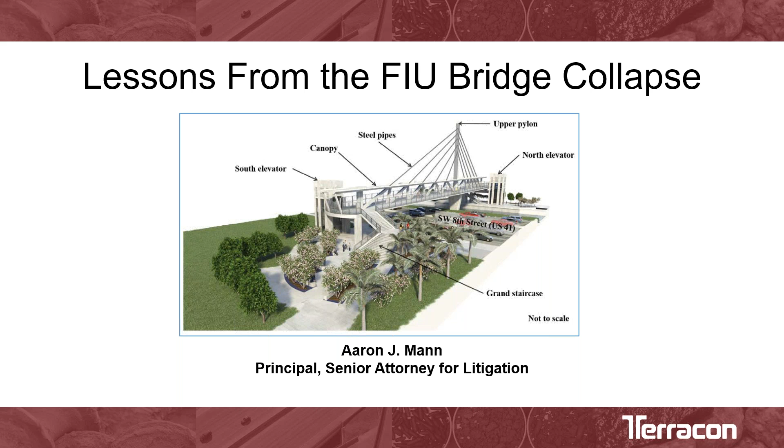I feel like I need to give a disclaimer up front, which is, obviously you heard my bio, and what you did not hear was that I have any background in engineering whatsoever. I spend my time arguing about whether or not engineers did a good job, but I struggle to put together IKEA furniture. So I would ask that as we go through some of these things today, that you understand I'm coming about this from a kind of a legal risk management perspective, and not from the perspective of truly engineering.

So let's talk about the project. This was a $12 million pedestrian bridge that the Florida International University had commissioned, and the idea was they wanted to link up their campus on one side and cross over this busy road and a canal to a residential neighborhood that was on the other side, a neighborhood where a lot of their students lived, and they wanted to provide a manner for their students to get to and from the campus safely.

Oddly enough, the impetus for this project was that one of their students, a couple years before this project had come into fruition, was crossing a busy road trying to get to campus and was struck and killed by a car. So from the very beginning, the idea behind this was to provide safe transit for their students.

But it was also supposed to be, I think, kind of a signature piece for the university. And if you look at this design, this is an impressive looking design for a pedestrian bridge. To have the very tall pylon, to have these cables stretching down, this was to be a focal point as well that I think the university was really proud of.

The project itself was funded with FDOT money, but FIU was the contract administrator for the project. FIU and FDOT worked in close conjunction with one another on this, and so they put this out to be a design build project.

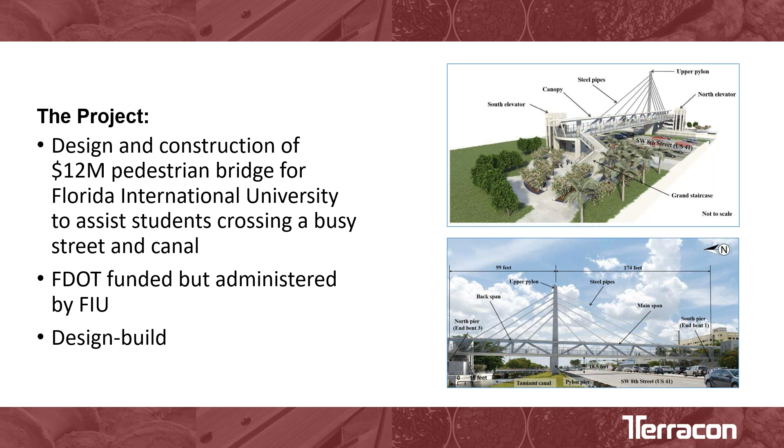In terms of the project team, you have FIU and FDOT acting as co-owners. You have Munilla Construction Management, or MCM. They were the design builder, and they were also the general contractor for the project.

You have FIGG. FIGG was the prime engineer, the prime designer, and the structural engineer of record for the bridge. You have Louis Berger, who was hired to do the peer review on the design. And then you have Bolton Perez and Associates.

They were the CEI firm, and they were hired directly by FIU and FDOT. I'll explain a little bit why I point that out, why that's important. But keep in mind that the CEI firm in this case is working on behalf of the owner.

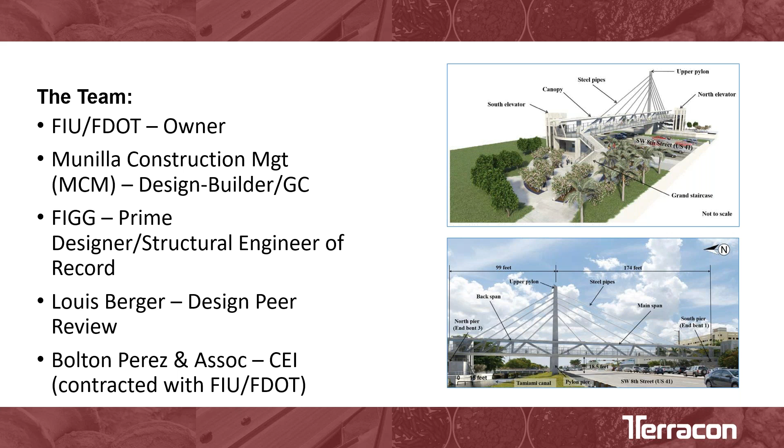As far as the design itself goes, very imposing, impressive structure. But really what it comes down to is you have two spans: the main span that goes over 8th Street, and the back span that goes over the canal. All of the steel pipes up above, everything that ties into the pylon, those are not structural components, just for aesthetic purposes. So this is not a suspension bridge, this is a truss bridge. There is a single truss running down through the middle of the main span and the back span, and it's a single concrete truss that's reinforced with post-tension cables.

As we go into this, eventually there's a report issued by the National Transportation Safety Board, and they go to great lengths to describe the unique nature of this design with a single concrete truss running down the middle. They refer to it as unique, I think unusual. They say they've never seen a bridge designed like this anywhere in the world, which is interesting to hear, and you'll see why, as they were also very critical of that design. But as you can see here, we're talking about two spans that rest on the piers on the ends and the pylon in the center.

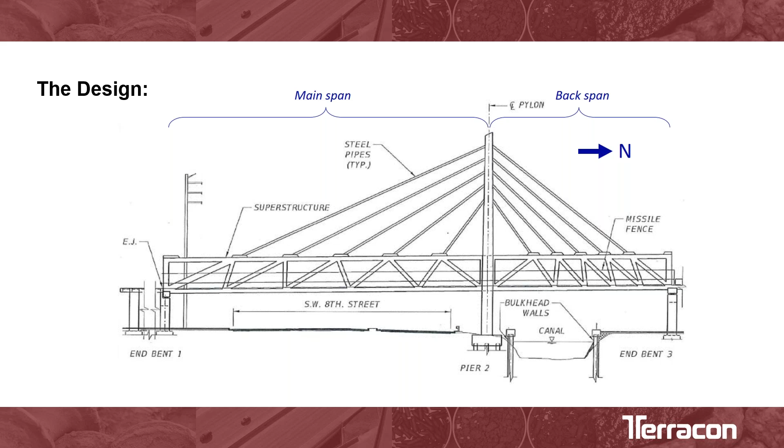As far as construction goes, it was to take part in 8 stages. Today we're going to talk about stage 3, which is the erection of the main span. Unfortunately, that is only as far as the construction progressed. But stage 3 meant that the main span would rest atop the south pier and the pylon.

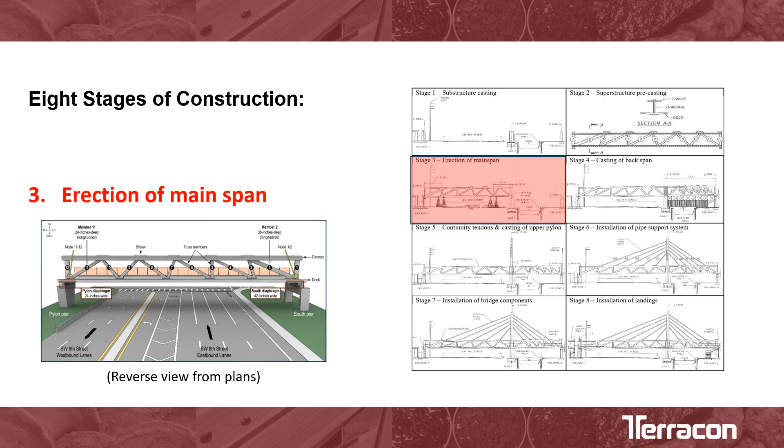The way this bridge was constructed, they used a technique called accelerated bridge construction, or the ABC method. This was a technique devised by FIU, so not only was this bridge itself a point of pride for the university, but even the manner in which it was being constructed was kind of their technology at work. The theory behind ABC is you have these components to the bridge that are all cast off-site and then brought into place. You essentially hook up these large pieces into the final design. One key advantage is that you don't have to shut down traffic for as long.

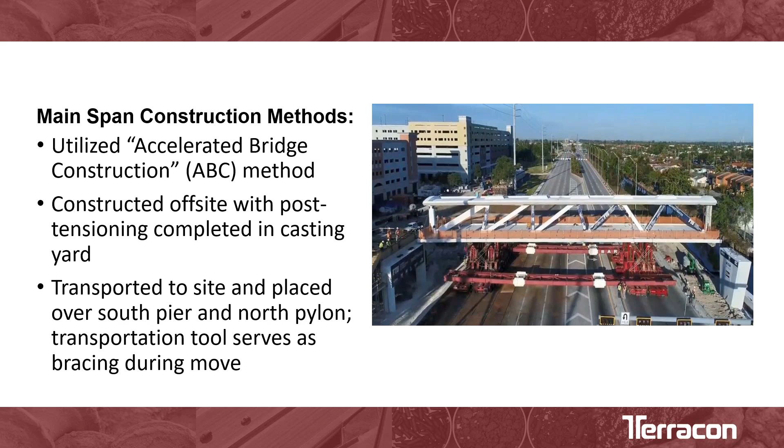In this picture, on the day it was taken, you can see they've shut down traffic for the day as they're bringing the main span into place. They did this on March 10th, 2018, moving the main span into place. This was a big day for the project, a day of pride. You had 6 PEs from FIGG there, including the president of the company, to watch this main span get put in place — the first real tangible piece of this bridge really coming into focus.

So they brought it into place, set it down on the pier and the pylon as designed. Then after checking it, they removed the bracing from underneath, removed the machinery, and it spanned the road, Southwest 8th Street — again, what it was designed to do. MCM, BPA, FIGG all examined it. They saw no issues at that point in time.

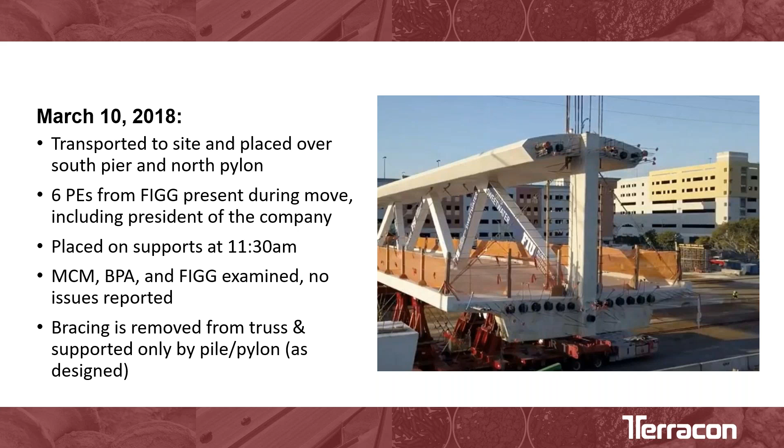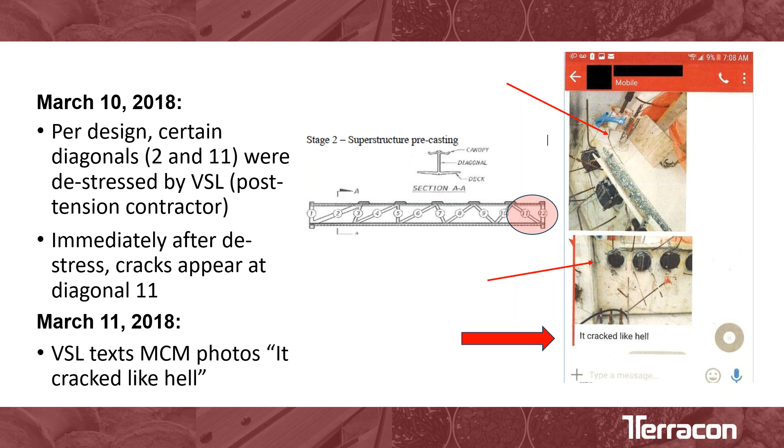On March 12th, MCM starts taking more pictures. Bolton Perez is out there as well, photographing these cracks. They notice cracking here, and pretty significant cracking here, all the way down through here. All this is in the same area—where number 11, which comes down diagonally, meets number 12 and the deck. So they take these pictures and send them to FIGG, asking for their input and for them to review it as quickly as possible.

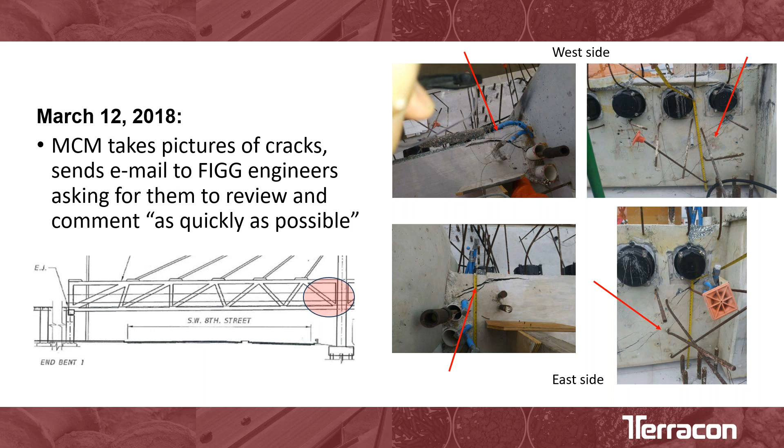Unfortunately, that email sat unopened until the next morning. The engineer at FIGG opens the email at 8:30, looks over the pictures, and an hour and 15 minutes later responds. They tell MCM to put in some plastic shims, but say no jacking is required, and that they do not see this as a safety issue. So you have the structural engineer of record saying they do not see this as a safety issue—they've looked over the pictures and they're not concerned.

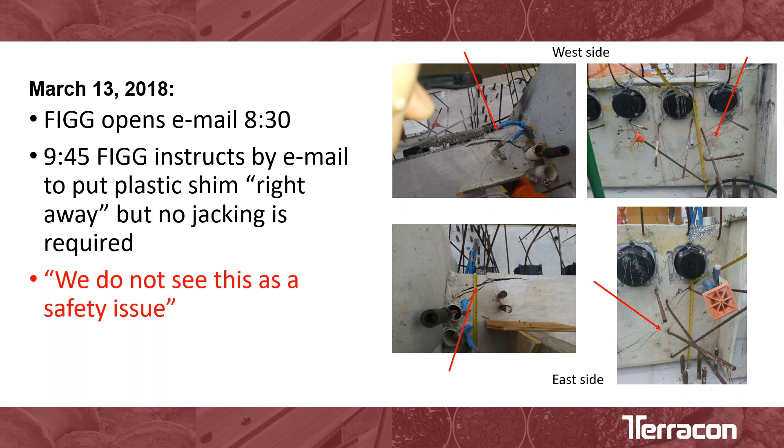Later that same day, the engineer from FIGG leaves a message for FDOT to inform them about the cracking, but says they do not see this as a safety issue and are not concerned about it from that perspective. Unfortunately, that voicemail was not opened until after the bridge had already collapsed. So FDOT would say they were never properly aware of the situation—at least that individual was not, though FDOT as an organization was.

Later on that day, 5:18, FIGG emails MCM saying they've evaluated this further and confirmed this is not a safety issue. So again, the structural engineer says, three times now, not a safety issue. At the same time, FIGG recommends they re-stress the post-tension rods in member 11. This is something that will be examined closely later, because it's not part of the original design. FIGG would say they're basically taking a step back—the original design had those tendons stressed, then they were de-stressed, and now they're re-stressing them to put it back in the condition it was before. NTSB and OSHA both say that was a design change that was not properly vetted. Nevertheless, that's the decision that was made, and it was communicated to the team.

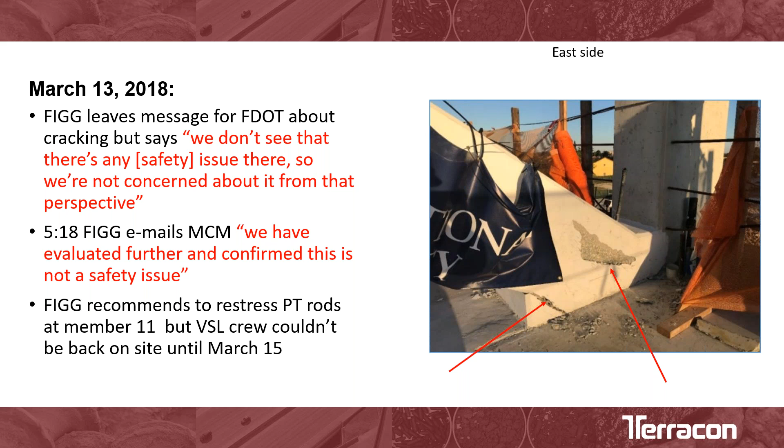As it turns out, VSL, the post-tensioning contractor, couldn't get out there for another two days, so they're scheduled to come on the 15th to do this work. Meanwhile, the cracks continue to grow. This is March 14th—you can see this crack is 4 inches deep, with a pretty significant length.

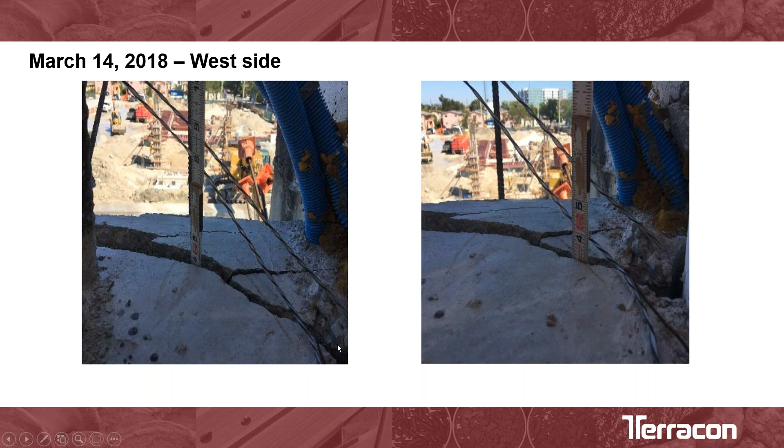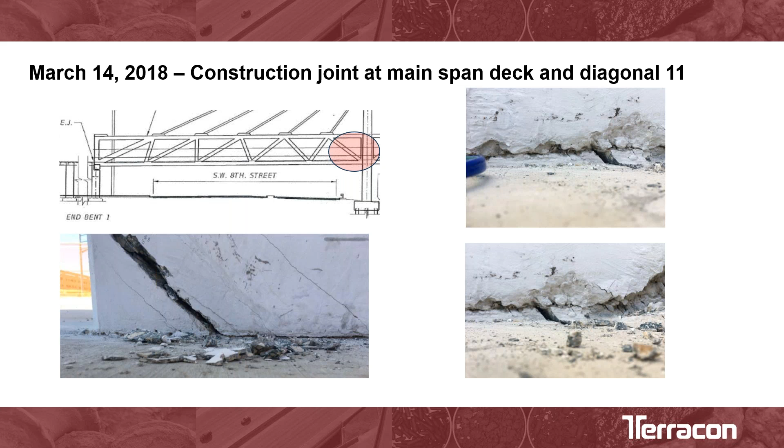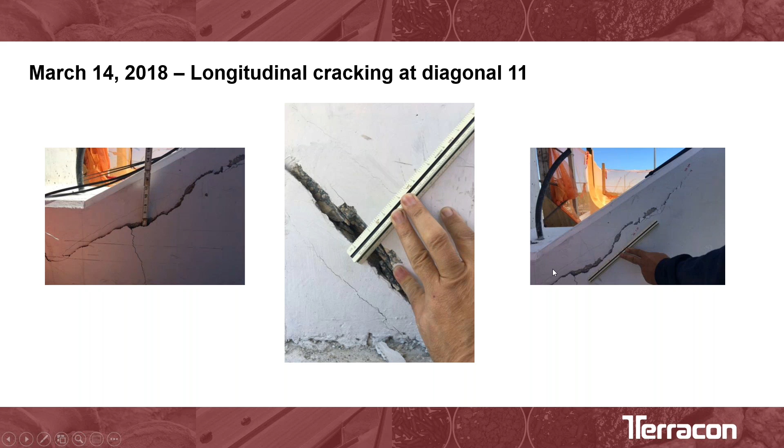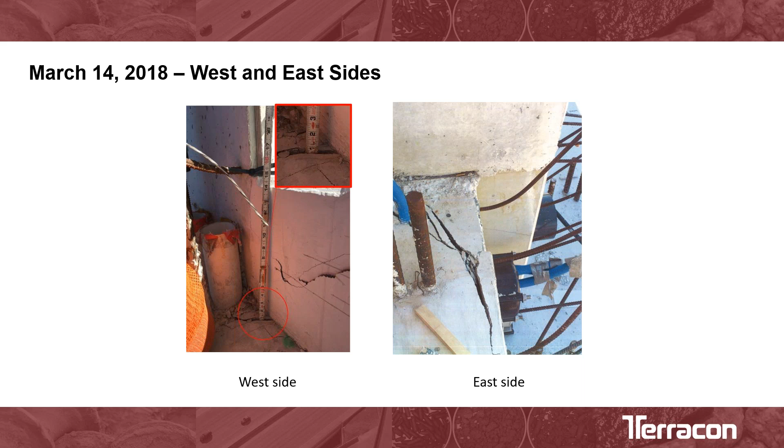We've got more pictures here from the connection between the deck and diagonal number 11. This has been in place for basically three days at this point, and we're seeing cracking like this—longitudinal cracking at diagonal 11, in this case well over a foot long, and even more on either side. All this is on March 14th.

MCM sees these cracks are growing, but they don't specifically tell FIGG that on the 14th. Instead, they call FIGG and set up a meeting for the next day, the 15th, asking FIGG, as the structural engineer, to tell them what's going on and give their findings on these cracks. So FIGG spends that day analyzing and preparing their presentation for the meeting. Meanwhile, VSL is told they need to mobilize for retensioning also on the 15th. I'll point out that while all these discussions are going on, while everyone is taking pictures of these cracks and discussing what they think may be the issue, traffic continues to flow on Southwest 8th Street underneath the bridge.

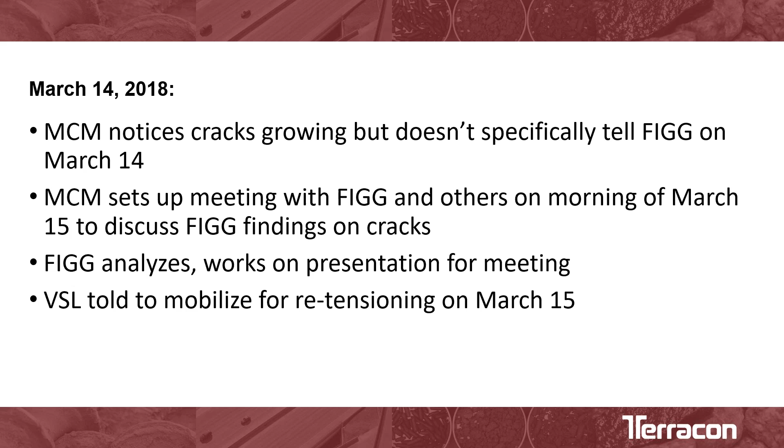So on March 15th, 7:45 a.m., people start arriving to the site for this meeting. You've got two structural engineers from FIGG, including the engineer of record. You've got MCM, you've got Bolton Perez. They all go out and examine these cracks.

And at 9 o'clock, there's an all hands meeting in the trailer. So you have MCM, you've got FIGG, you've got the university, you've got FDOT, and Bolton Perez. At that point in time, FIGG gave a presentation to everyone. They said that they have no safety concerns. They said that this was only a temporary loading condition.

At the same time, FIGG could not explain why the cracks were as extensive and what it was they were seeing. They said it was not replicated by the engineering analysis. And so while this is going on, two things are happening. Number one, VSL goes out to begin their post-tensioning work with 3 employees on the bridge. And again, traffic continues to flow under Southwest 8th Street.

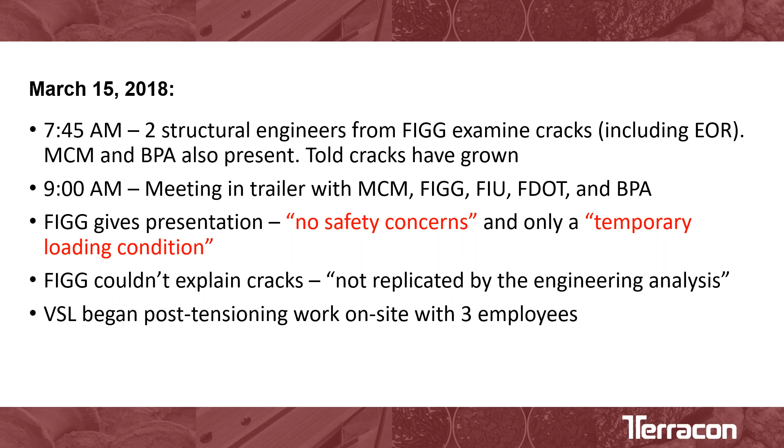Which takes us to 1:46 p.m. on March 15th.

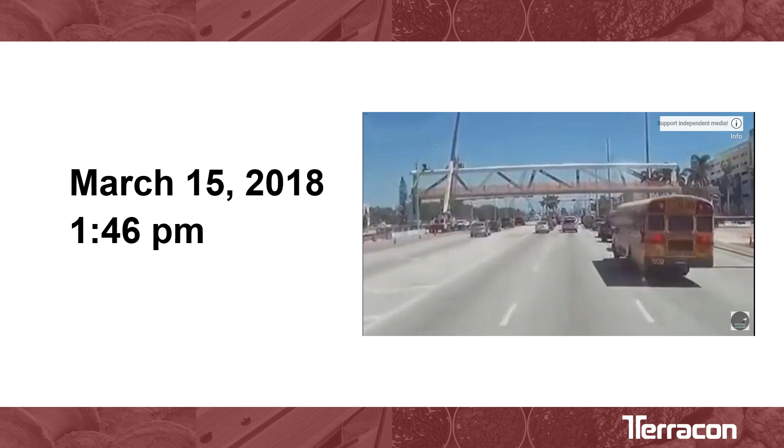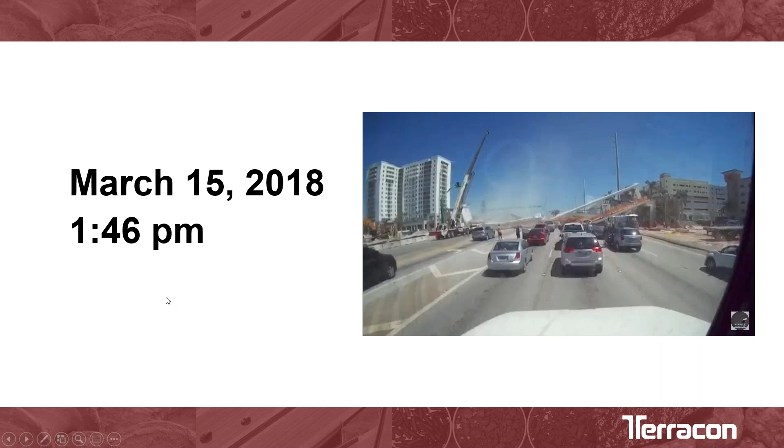Now, I feel like I need to make this clear. I don't show that video to be gratuitous. I don't show it to sensationalize this. I truly hate watching that video, and I've watched it many times, and every single time, it's uncomfortable to watch. I show it because that's what happened.

That is the true consequence of some of these decisions that were made. And so even the diagram that I have here on this next slide, that talks about the mechanism by which the bridge failed. If you look at that, what's missing? There are no members of the public underneath that bridge, and unfortunately there were that day.

And so what happened was, as VSL was doing their work, as they were retensioning 10 and 11, they experienced a blowout of concrete, and the span, because again, it's supported with a single truss, and there will be some that say that it lacked redundancy, that the bridge lacked redundancy, but because member 11 failed, the entire bridge failed, and the span fell 18 feet to the ground.

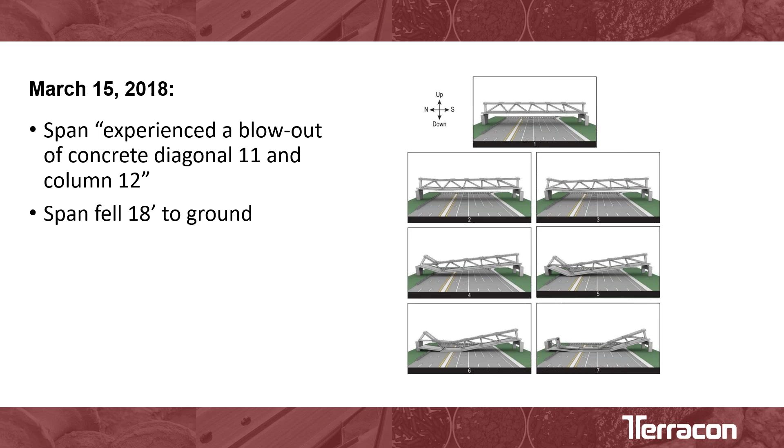And in that moment, 6 people were killed. There were 5 motorists and a VSL technician who was standing on the deck. There were 2 other motorists who were seriously injured, and another one of the technicians from VSL is now permanently disabled. That is the personal aftermath of what happened on this day.

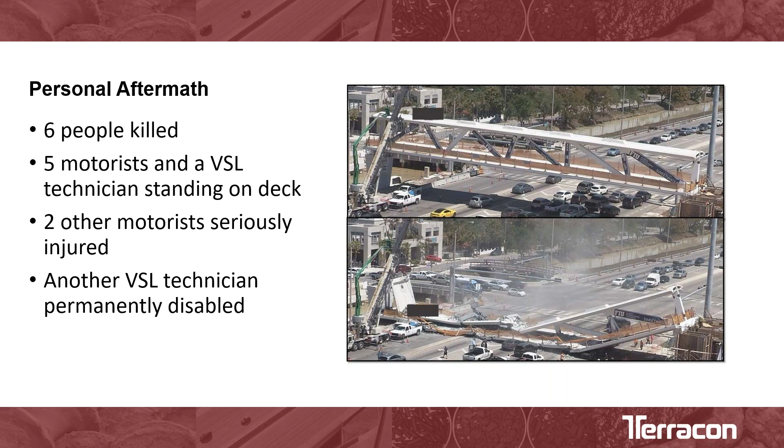And unfortunately, there's not really a good way to transition to the professional aftermath. I think it certainly pales in comparison. But that is what we're here today to talk about and to learn about as members of the engineering community. And so in terms of the professional aftermath, there were a number of things that occurred.

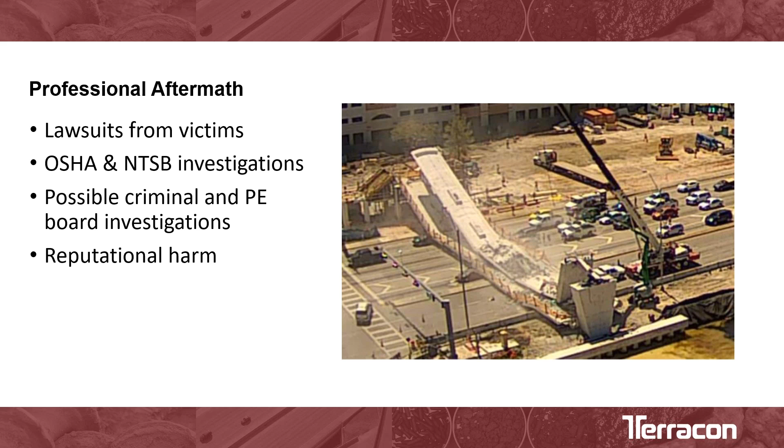There were, of course, lawsuits from the victims. There were investigations from both OSHA and the National Transportation Safety Board. There is the possibility still outstanding of even criminal, but certainly PE board investigations. And then, of course, there's reputational harm to the firms that were involved in this. We're going to talk about each of those things in turn here.

The lawsuits actually, they happened pretty quickly, and they were resolved pretty quickly. There were 25 project participants, and so honestly, anyone who touched this project paid something to these victims' families, and they contributed to a total settlement pot of $103 million.

I say everyone except for, and I'm going to talk about them separately, but except for Louis Berger, who did the peer review work. They, at the outset, they were not part of this $103 million settlement. So everyone except for the peer review firm contributed towards this, and we believe it was policy limits. We don't know for sure.

And I guess I should say, everything I know about this, I've learned from publicly available resources. I don't have any inside knowledge. Certainly, Terracon was not involved in this project, but we believe that likely everyone paid their policy limits to resolve these disputes. Additionally, another $9.5 million was paid to the university.

Now, Louis Berger, they, as I said, they did not contribute to that $103 million. And I think the reason for that is largely, this is just kind of me reading between the lines. But they're looking, saying, hey, look, we did the peer review.

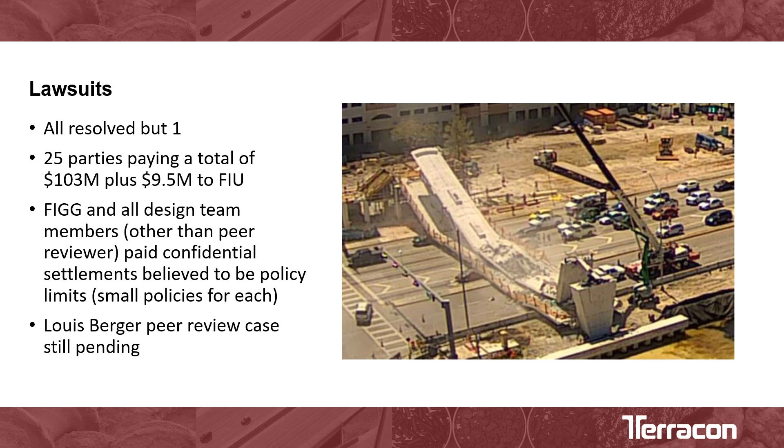There's one claim involving a guy riding a bike who said that when he was riding, a car saw the bridge collapse and he was distracted and hit him. Therefore, he's going to sue the peer review firm. Again, apologies, that's me being a defense lawyer for a second. But they're still holding on to some of these and going through the process of disputing those lawsuits. I'd say largely speaking, these have been resolved.

What also happened was you had investigations from OSHA and the National Transportation Safety Board, and they both reached the conclusion that this was a design error. Needless to say, FIGG tried very hard to make this into a construction issue, and neither agency was convinced that was the case. They said it was a design issue, and that was the primary reason for the collapse.

They also took specific issue with Louis Berger's work. Now, as the peer review firm—and we're going to talk about this—they said Louis Berger did not do enough in their scope of work as the peer review firm, and if they had done their work appropriately, they would have caught this issue.

But then finally, they said all the parties failed to act on the warning signs and to cease work. They said nobody shut this project down, no one closed the road, no one put any support underneath this span.

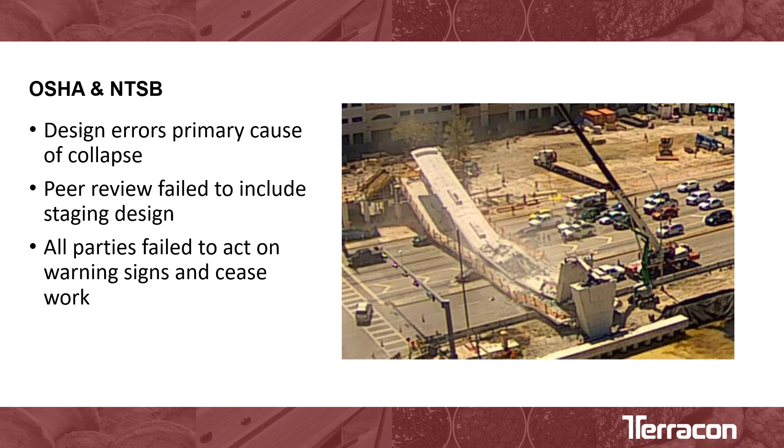And so when the report from the NTSB came out, there was a statement issued by the chairman that accompanied it, and he says the bridge was talking to them. And it wasn't just talking, it was screaming that there was something definitely wrong with this bridge, yet no one was listening. Pretty strong words, and that certainly was the theme of the NTSB's report.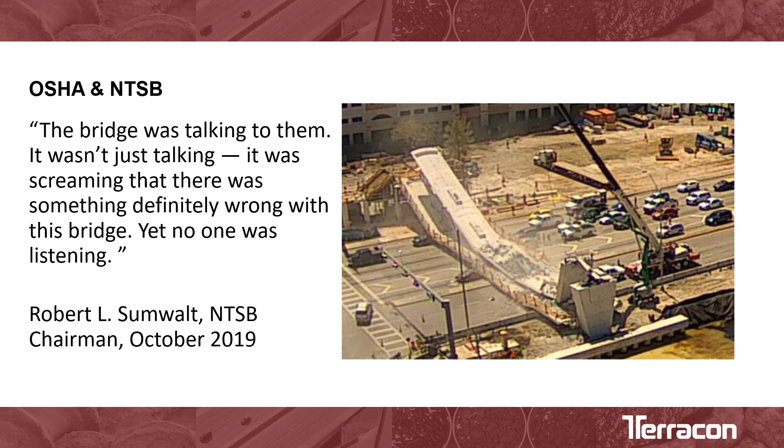They were critical of everyone for not stopping this work. But at the outset, they said, from a pure design standpoint, the design underestimated the loads at that connection between diagonal number 11, vertical 12, and the deck. And at the same time, it overestimated capacity at 11 and 12 to resist shear because of the incorrect loads in the calculations.

But then they also said there was a lack of redundancy in the design. Going back to the idea that it's an unusual, unique bridge—a design we've never seen anywhere in the world—one thing they were very critical of was that this entire structure rested on the strength of that single truss running down the middle. And you can see, just by virtue of the fact that once member 11 gave out, there was no redundancy—nothing else to keep that bridge in place.

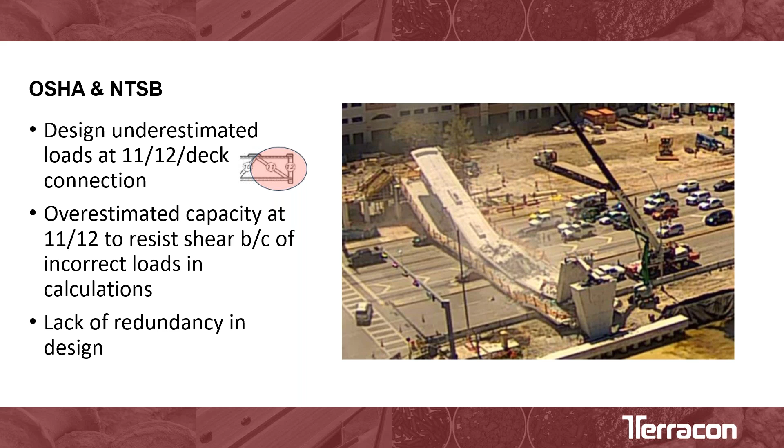But I would say more than the design issues, OSHA and NTSB really faulted the parties for their inaction. They were very specific in calling out Bolton Perez, the CEI firm, saying they should have recommended closing that road. They should have recommended to FIU and FDOT that they essentially go around the structural engineer of record, who said multiple times this is not a safety issue, and used their own independent professional judgment to say there is an issue, there is a safety concern.

Now, if I'm the lawyer for Bolton Perez, I'm saying they did everything they were hired to do. They went out, photographed this, and provided the information to the owner, their client, who could then make whatever decisions they needed to make.

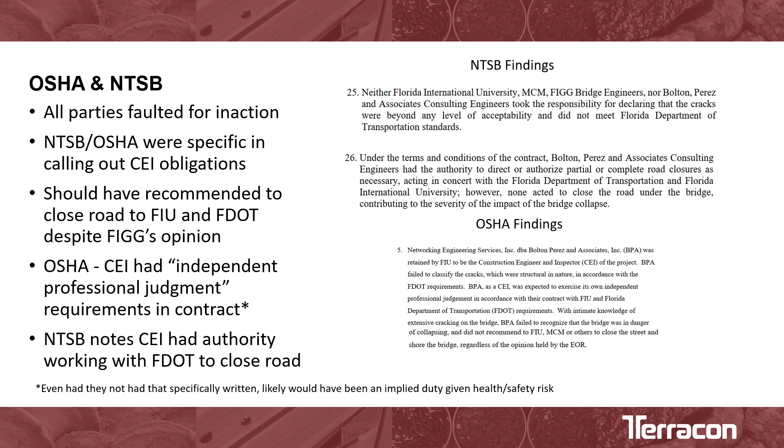I would argue that it is the job of the structural engineer of record to make the calls that they were making. But NTSB and OSHA have a different opinion, quite frankly. They say that not only should Bolton Perez have gone to FIU and FDOT and recommended that they close the road, they say that they even had their own independent ability to close it if they wanted to, because they were working sort of on behalf of FDOT. I don't know that that's the case, quite frankly. But I also know that my opinion in the matter doesn't really matter, because the National Transportation Safety Board said that Bolton Perez should have gone out and closed the road on their own.

With regard to Louis Berger, the NTSB and OSHA were critical of their work as well. Louis Berger was very quick to say, we had a very, very limited role in this project. We were hired to review the final design for the completed bridge. And NTSB and OSHA both said, well, your review should have looked at every single stage.

So we talked about the 8 stages of construction. You should have reviewed the conditions for each one of those stages. Louis Berger said, we tried to do that. We tried to get an agreement with our client, with FIGG, to do that. And the engineer who did this work testified - this is a quote from him. He says, in the beginning, I suggested to do this kind of analysis, to analyze the connections, the nodes or the joints. However, the budget and time to do this actually was not agreed upon with the designer.

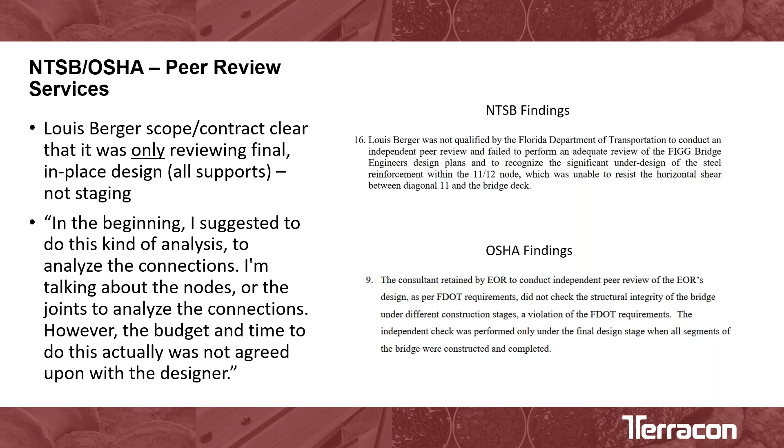So who hasn't been in that position, where you go to your client and you say, these are the things that I want to do, this is going to give you the best final product, and the client says, I don't have a budget for that. And so between FIGG and Louis Berger, they decided that FIGG was really only interested in having a peer review of the final, complete, in-place design. But to add insult to injury, they cut their fees for that work.

Louis Berger said it's going to be $110,000 to do this review of the final in-place design, and FIGG said I only have 60,000. So Louis Berger did it, and they took the $50,000 pay cut. They did the limited review, and their contract's very clear in terms of the review that they were going to do - it truly was just the final bridge design.

But as NTSB and OSHA pointed out, this is an FDOT project, and FDOT has its own rules and regulations, and the FDOT regs require a comprehensive review with a different design program. What NTSB, OSHA, and FDOT all concluded was that a comprehensive review is not a review of just the final in-place design, but a review of every single stage of that construction. So Louis Berger was cited by OSHA and by NTSB for violating those FDOT regs and not reviewing the stage design. Again, that was not what they were hired to do. But NTSB and OSHA didn't care what they were hired to do - they said they had their own obligation to do this if they were going to be involved in an FDOT project.

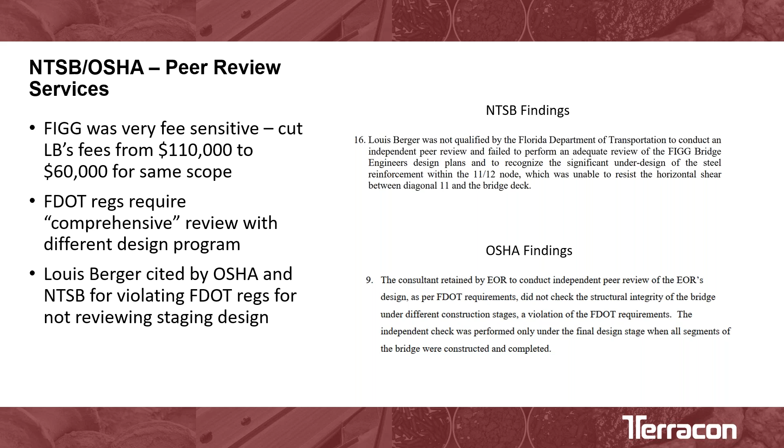So in addition to agency action, there is still the potential - and I want to stress potential - but there is still the potential for criminal action. This is a headline from the Miami Herald from about a year ago that says, 'Feds figured out why FIU bridge fell. Now prosecutors must decide if deaths were a crime.' This is something that is on a lot of people's radar, and they are absolutely looking at that.

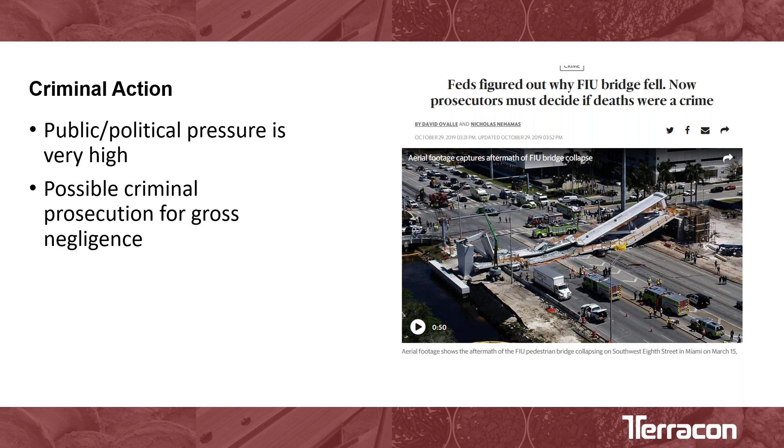Now, I think as time goes by, the likelihood of that lessens. But I think with something like this, where you've got the NTSB report, which is extremely critical of everybody involved, and you have 5 members of the public and 1 worker who lost their lives because of this, there's going to be that pressure, at least, if they're not going to pursue criminal charges, to be able to explain why. And I think one of the things that may impact that is something else that's still out there, which is the input from the Florida Board of Professional Engineers.

If you go to their website right now, there's a page talking about the FIU pedestrian bridge collapse, and it's been up for about 2 years now. It says that the board is going to monitor developments as other agencies, referring to OSHA and NTSB, complete their investigation. And if the cause is determined to be an engineering issue, FBPE will take any necessary steps, including disciplinary actions, to ensure public health and safety.

So they're setting their position out right now, saying we are waiting to hear back from NTSB and OSHA, and if it's an engineering issue, then we will take action.

Well, all of that has occurred. NTSB and OSHA have completed their investigations. They've issued their reports. They said unequivocally that it's a design issue. So my assumption, and it's only that, is that the Florida Board of Professional Engineers has now picked it up from there, and they're doing what they need to be doing behind the scenes to figure out what licensure issues there may be. But I fully suspect this is going to be the next stage in that process.

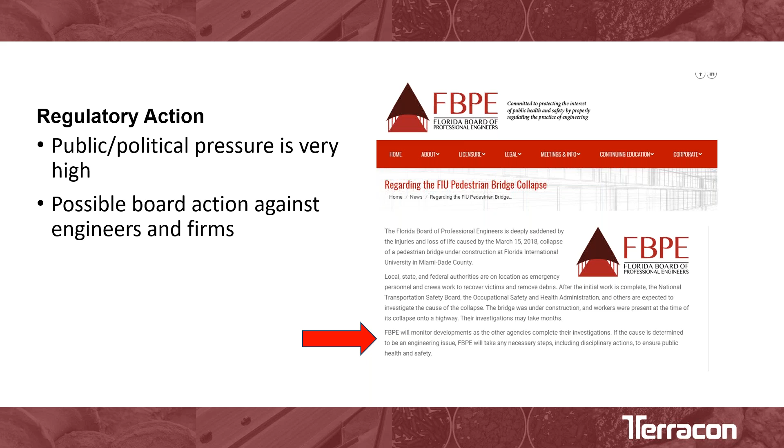For all of the companies involved, there has been reputational harm, and I say that without judgment in terms of whether or not it's merited. It's just a fact of life. There's been reputational harm for everyone who has touched this project.

MCM is bankrupt, and they've emerged from the bankruptcy, restructured, and rebranded themselves as Magnum Construction Management as opposed to Munilla. They changed their name, I would say, in no small part to distance themselves from this project.

FIGG, BPA, Louis Berger, they've all had brand damage. I would say probably none more than FIGG, which we're going to talk about here in a minute. But they've all suffered brand damage because if you search for any of these companies' names, one of the first things you're going to see is an article about the FIU bridge collapse. You just are.

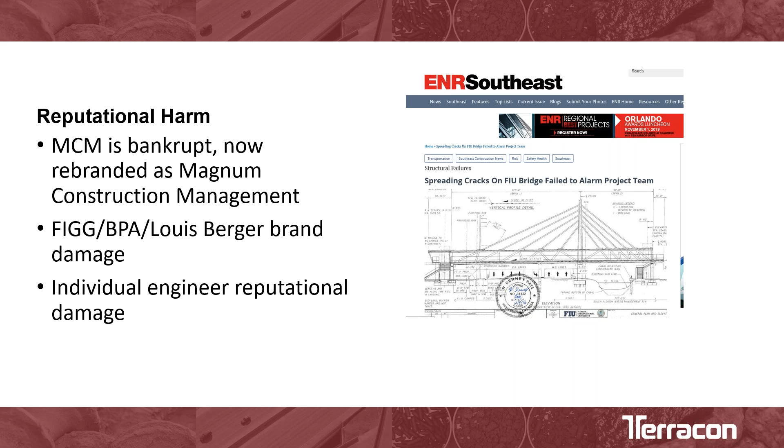But there's still, even to this day, we're now 2.5 years past this, continuing fallout. So just recently, in the past couple months, MCM has sued Louis Berger. And in the time since the bridge collapse, Louis Berger was acquired by a company, WSP. MCM has sued WSP, saying that basically the money that they had paid out to the families of the deceased should come from Louis Berger, who did the peer review of this design.

Interestingly enough, they don't name FIGG in that lawsuit, which to me says that a separate deal has been cut, and I don't mean that nefariously. I just mean that they have resolved their issues, and now MCM is still looking to recover from anyone who's still around and has some money, and I think that's Louis Berger and now the company that owns them. Louis Berger is still preparing for trial with some of these individuals, and with courts being shut down for COVID, who knows how long it's going to take before some of those issues get resolved.

But I think that of the continuing fallout and the reputational harm, FIGG has seen it the worst. FIGG was recently hit with a 10-year debarment from the Federal Highway Administration. They lost 2 very large projects in Texas, very, very high-profile projects. One of which, if I recall correctly, the CEO has said it was responsible for 42% of their revenue, just that one project. But this 10-year debarment from essentially all government work, and of course FIGG specializes in bridges. There are not a lot of private bridges being constructed, quite frankly.

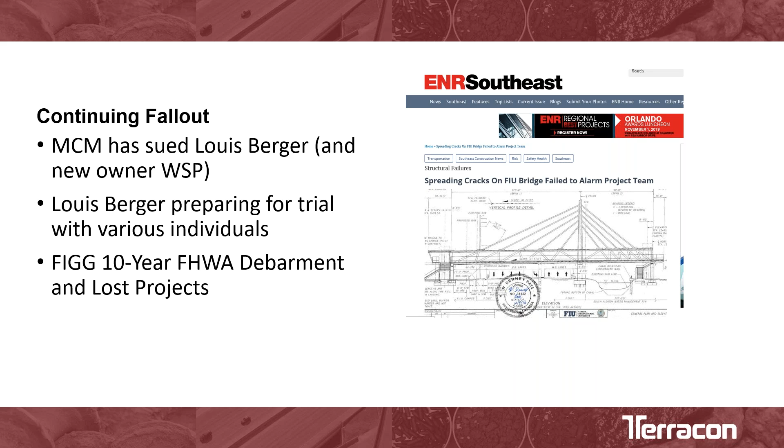The CEO for FIGG has said that if this order stands, and they've tried to get it overturned, they haven't been successful as of yet. I think they're still continuing. But the CEO of FIGG has said that if that order stands, then there will not be a FIGG, that they will cease to do business. So that fallout continues.

Now, generally speaking, when I give this presentation, I like to turn it into a conversation. It's kind of hard to do that through WebEx, but I'm going to leave you with a couple of thoughts before we get into question and answers, because I would imagine there's probably going to be quite a few.

The first is the CEI's role, and whether it is their obligation to question the structural engineer of record. NTSB and OSHA said, unequivocally, that Bolton Perez failed to exercise their own independent professional judgment. I would argue that they did everything that they were required to do by contract. They're out there, taking pictures, reporting that information back, keeping the decision makers informed of the current conditions on site. But the question is, is that enough?

I've had this discussion with a number of different groups of people, and it seems like there's a pretty even split between people who say their role is not to second guess the structural engineer of record. That is not their job. Their job is to keep the owner apprised, to document the conditions, to give everyone the information they need.